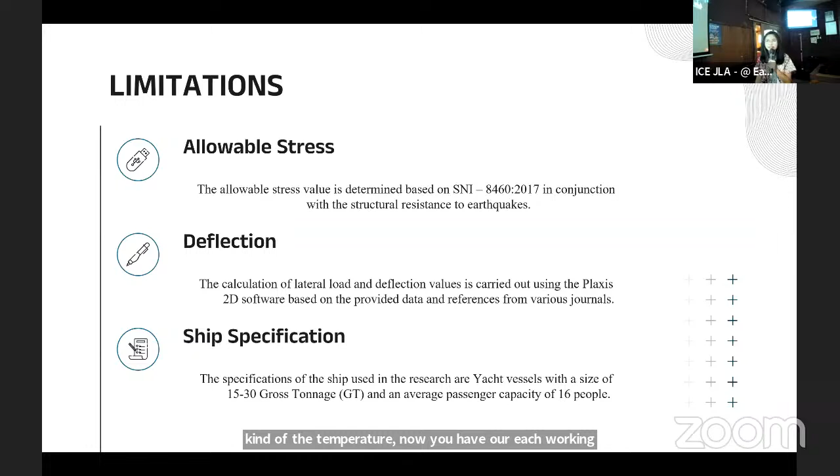The objective of my recent study is to determine the variation of lateral force in the port structure, and also determine the deflection of the pile and satisfactory value for each working phase. The limitation for this study is based on SNI 8460 in year 2017.

The deflection values are carried out using Plaxis two-dimensional software. Based on the provided data, the ship specification is a yacht vessel with a size of 15 up to 30 gross tonnage, and average passenger capacity of 16 people.

Here is the methodology I used for this study. I did the literature study, collected the data, and then modeled the structure with Plaxis two-dimensional. I did verification of the deflection values according to the criteria from SNI 8460 year 2017, and if the value does not meet the requirements, I did the reanalysis by changing the dimension of the sheet pile.

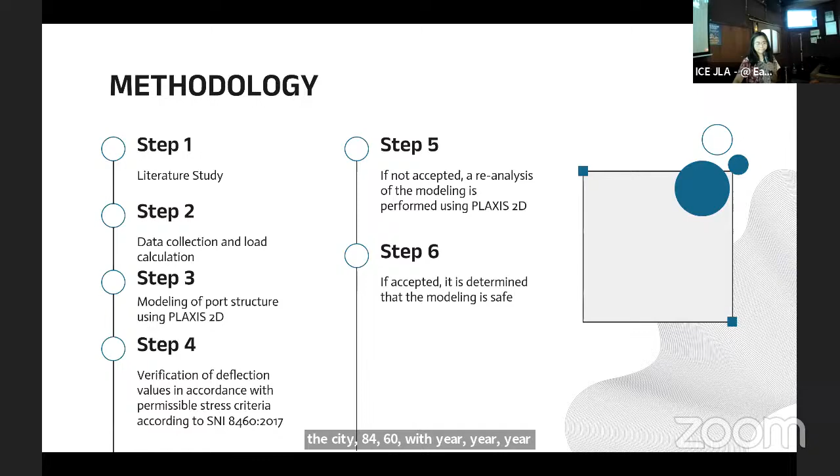Here is the alternative design proposed for this port structure. I recently did the analysis in this square area, which is the most extreme area, with the depth of the sheet pile at -10 meters.

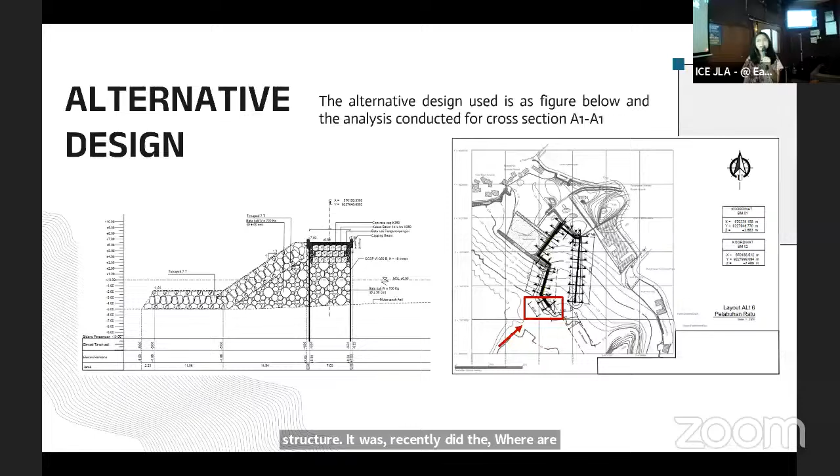Here I did the analysis with the software PLAXIS 2D, which is used to analyze deformation and stability in geotechnical engineering. It is usually used for excavation, embankments, and foundation tunneling, such as mining, oil and gas, and so on.

I also did the calculation for the soil stratification, and the soil parameters found were 4 types of soil layers. This soil parameter was input into Plaxis two-dimensional.

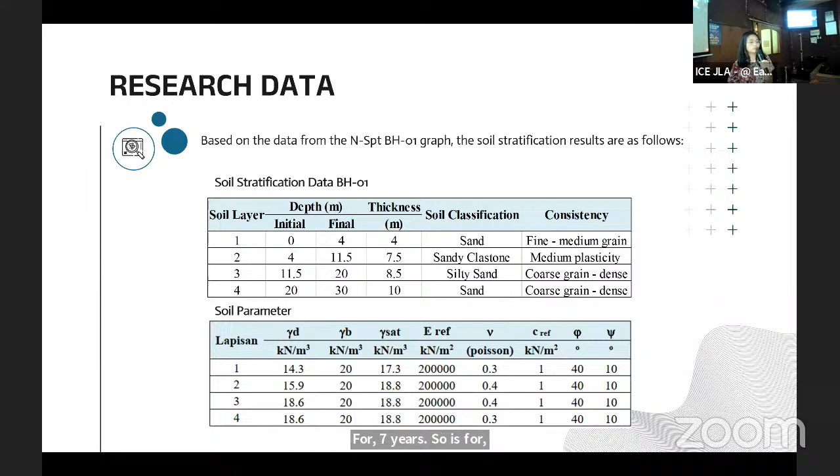I also determined the horizontal coefficient of the earthquake, found to be 0.284.

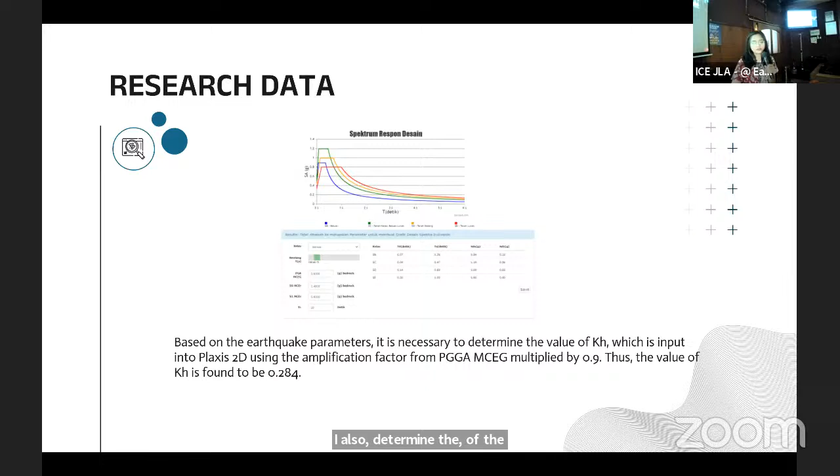In this modeling, firstly we have to determine the working phases. I did the phasing by installing this sheet pile and then continued up to placing the truck load. Next, I also did the load phases such as live load, wave load, mooring, and berthing, and input the safety factor phases to determine the value for each working phase.

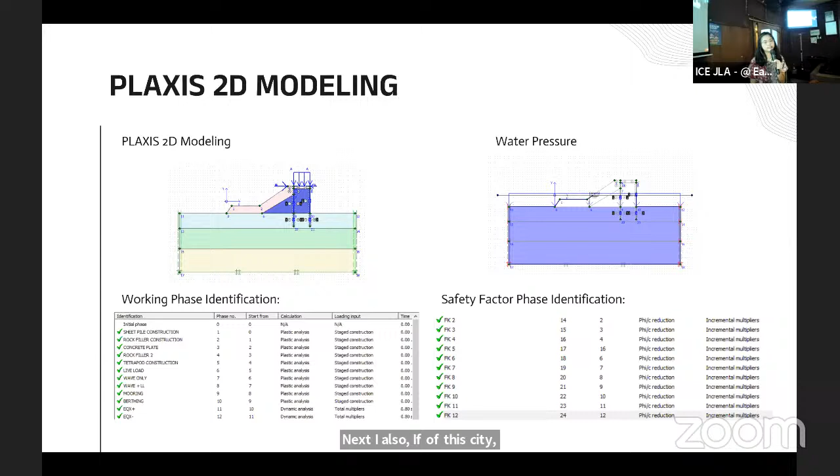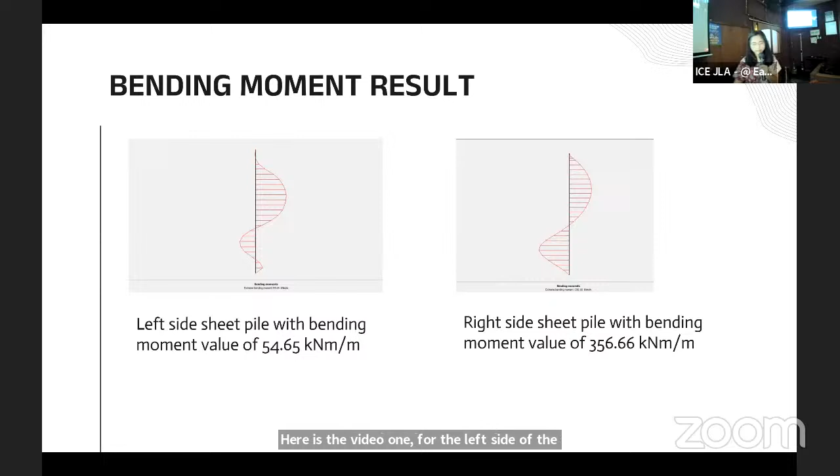So from my recent study, I found that the value for deflection, bending moments, and the safety factor for each working phase still meet the requirements and are still safe. I also found that the dimension of the sheet pile used was CCSP 600, and it is shown that the sheet pile section is still good. Thank you.

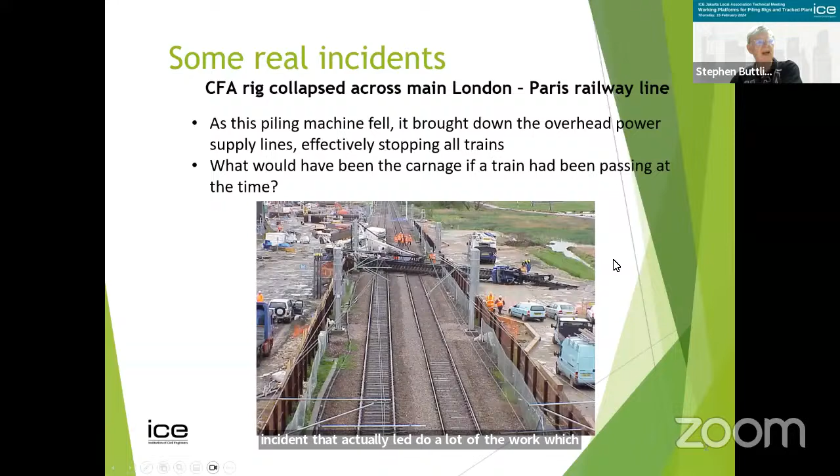My talk here really starts around 2004 when an incident happened and a CFA rig tipped over, bringing down the catenary cables for part of the London to Paris railway line going through the Channel Tunnel. That cut off the power, so no trains came past. Just try to imagine if a high-speed train had been passing at the very moment that piling rig came down - it's hard to imagine the consequences, but they would certainly have been disastrous. It was this incident that actually led to a lot of the work I'm going to talk about. I've got a couple of other examples, but we had problems getting the video sorted out, so I'll brush over these now and come back to them at the end.

I've got some illustrations as to why this is still very important in 2024. I'm going to touch on how we calculate rig bearing pressures, but not in any detail - that's normally done by the piling contractor. I'll touch on whether the main design method is conservative or not, and talk about that method, referred to as BR470, the catalogue number of the BRE report describing the design method. They also did a review of it 7 years later in 2011, which I'll mention. I'll also talk about the Temporary Works Forum of the ICE, which produced a different design guide, and mention the T-value method produced by Andrew Lees, a consultant to Tensar - Mike knows Tensar well and has written papers on that subject. I'll talk about calibration of design methods, the importance of selecting parameters, and work by David Cork and others in the UK and by Andrew Lees.

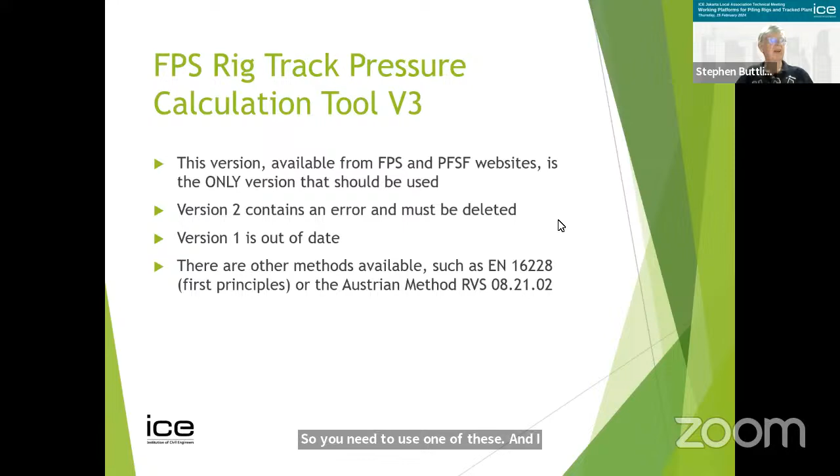So moving on now to the design method, it's all contained in this BRE report, BR470. But there have been suggestions, particularly in Australia, from some people that I know, that it's conservative.

I'm quoting from a written document that I have a copy of, where one of the designers said, we have not followed the BRE method for this platform, as it is known to be highly over-conservative for granular subgrades. And his manager actually sent me another message, which I have in writing, where he said the typical view of most practitioners I met and discussed the issue with support the view that BRE is conservative.

And yet, in spite of these two written statements, I tried very hard to get people to tell me what is it about BR470 that is conservative. In the method, which step do you consider to be conservative? And by comparison with what are you ranking BR470 as conservative? I have not been able to obtain any answers to either of those two questions. People are happy to just bag the method as being over-conservative, but will not actually provide any evidence to support their point of view.

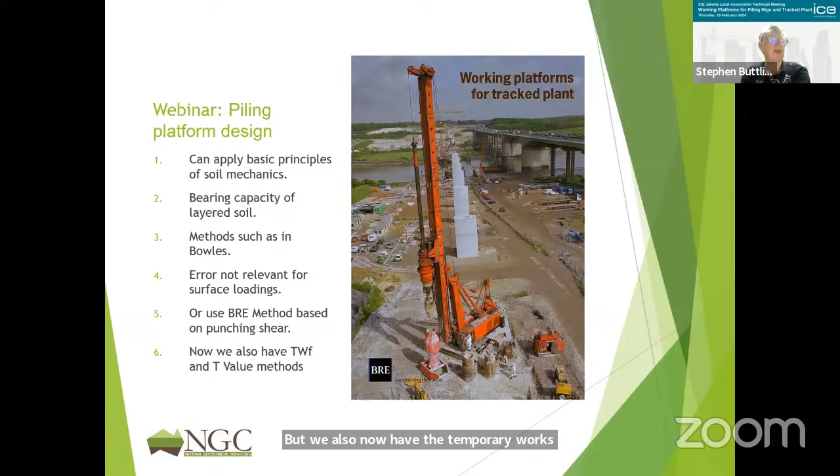But the BRE chose to use a method based on punching shear, and I'll talk more about that in a moment. We also now have the temporary works forum method, which is different, and the t-value methods.

So in the BR470 design process, as always, we need a geotechnical model. We need to define our geotechnical parameters. For the platform, these are the weight density, gamma. A lot of you will probably still call that unit weight, but I've gone away from unit weight following the lead from Europe, because the unit has no meaning. What we now tend to call it, we use weight density for gamma, and mass density for rho, because those better describe what the actual parameter is.

For the platform, we also have an angle of friction, phi dash, and the subgrade. I'm going to concentrate this evening on cohesive subgrades, so we're talking about an undrained shear strength. The BR470 method is only applicable for soils greater than 20 kPa and less than 80 kPa, where a working platform in many cases will not actually be necessary. If your subgrade is weaker than 20 kPa, you need to be very careful and use better, more reliable design methods.

So in the design process, we look at two loading cases. Load case one is where, if the rig is about to tip over, there is nothing that the operator can do to save it. This would be if the rig is just standing there and it starts to fall over — the operator hasn't done anything, so there isn't anything he could do to prevent failure. Typically, if he's just traveling across the site, there's not likely to be much that he can do to prevent a failure. And if he's lifting something, such as a casing, a rebar cage, or a precast pile, he's not going to be able to put any of those things down fast enough to prevent a failure.

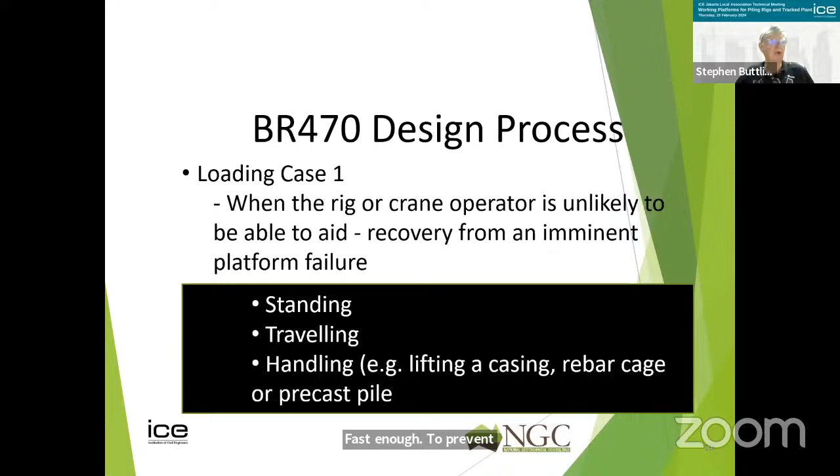So all of those are referred to as load case one. The alternative is load case two, where the operator can do something. Typically these are where the operator is applying a force, either a crowd force, a downward force, say to install a casing or a drilling tool, or an uplift force or extraction force to try and pull an auger, a bucket, or a casing out of the ground.

And if either of those is producing instability, causing the rig to tend to fall over, basically the operator can ease off on the throttle, stop pushing down or stop pulling up, and the problem will be mitigated. It's also just about possible if they're traveling or slewing and either the mast foot or the load itself, suspended load, is sufficiently close to the ground that it can be put down to prevent failure.

Not necessarily quite as easy as just easing off on the throttle, but those are considered to be load case two. In the design process, the bearing pressures are generally not going to be a uniform pressure along the length of the tracks. They'll typically have a higher pressure at one end and a lower pressure at the other, like Q2 and Q1 here, giving a trapezoidal bearing distribution.

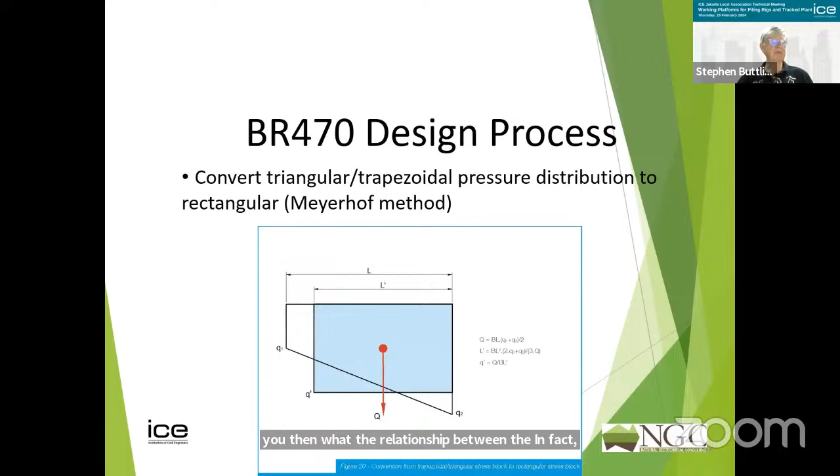And the geometry will tell you then what the relationship between the effective pressure Q dash and the pressures Q1 and Q2 are. That then will give us two uniform bearing pressures. Case one, a smaller pressure over a longer length, L1K, and case two, a higher pressure over a shorter effective length, L2K, with the track width, WK, being the same in both cases.

So first of all, we say, is a platform required at all? We check if the subgrade alone can support the track load. We do a standard bearing capacity calculation, and for case one, where we can't do anything about putting the load down, we use a load factor of 2. And for case two, where we can put the load down, we use a lower load factor of 1.5.

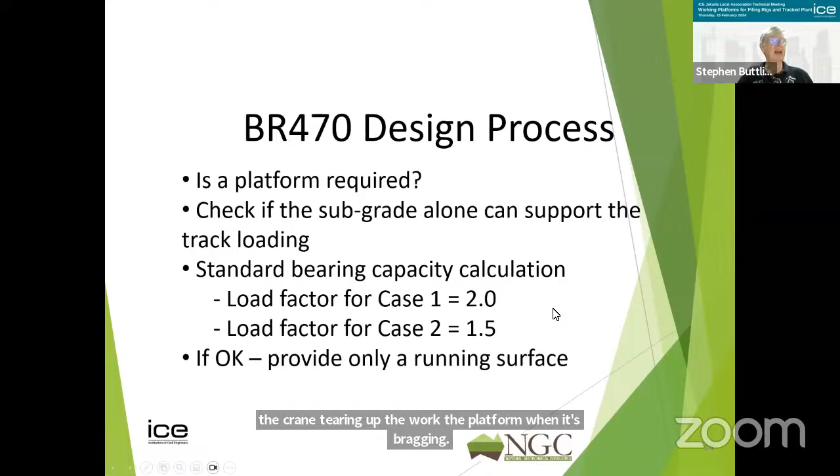And if both of those are okay, all we need to do is provide a running surface, a crushed rock surface, probably at least 150, maybe 300 mil, to stop the crane tearing up the platform when it's spragging, but a working surface is okay. If they're not okay, then we need to design a working platform.

And the first thing we have to do is check that our platform material that we're proposing to use is good enough to provide the necessary bearing capacity. Now our load factors have come down from 2 to 1.6 and from 1.5 to 1.2. And that's because we were using 2 or 1.5 for natural ground. And we know that natural ground is very variable.

It has spatial variability. But it's considered that a working platform, being a man-made platform with imported material that's been spread and compacted and tested, is more uniform, more reliable than a natural soil deposit. So we have lower load factors. But if those are okay, then a working platform can be designed. If they're not okay, then we need to get a better material for our working platform. And that basically means a higher angle of friction, phi. And if they are okay, then we go ahead and we determine the thickness of the working platform.

The BR470 process relies on what we call punching shear, because we've got this whole question of what happens under this loaded area through the granular soil. Many of us will be familiar with load spread, but there's a lot of debate about what the angle of load spread should be, and lots of different ideas. BRE decided to avoid those by using a vertical shear surface and calculating the punching shear on pushing the rig track down through the granular platform, and then a log spiral type failure surface in the underlying subgrade.

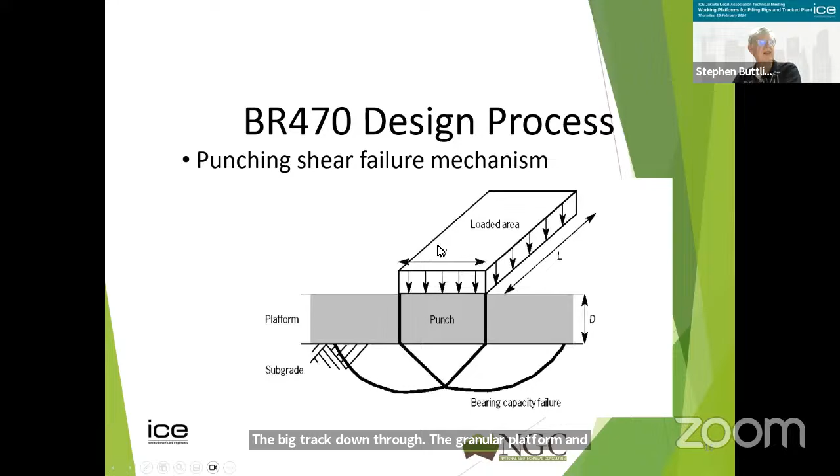This again shows how you'll have a lateral earth pressure against that vertical punching shear surface and the sort of distribution of side shear that you might get.

So the BRE determined this equation where D1 is the platform thickness. The numbers that we put in are WD, which is the width of the track, Q1D, which is the design value of the bearing pressure, the undrained shear strength, the bearing capacity factor, and a shape factor, all to the power of a half, divided by the weight density of the platform, the Kp tan delta of the platform, and a shape factor for the platform.

We do this calculation knowing all of these values on the right-hand side. We can calculate the required thickness. We check that the platform is at least 30 centimeters or half of the track width, whichever is less.

I am quite certain that this is where the calibration of the BR470 process was carried out, and that is an absolutely vital part of the process. What I am quite certain the team at BRE did was use more rigorous calculation methods, which could have been finite element methods, analytical methods, or both.

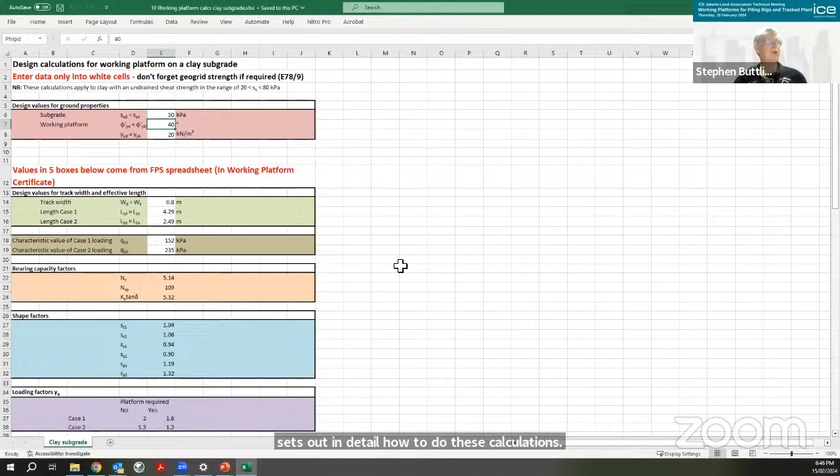In the back of the BRE report, BR 470, it sets out in detail how to do these calculations. And I've made them into a spreadsheet. It's fairly simple.

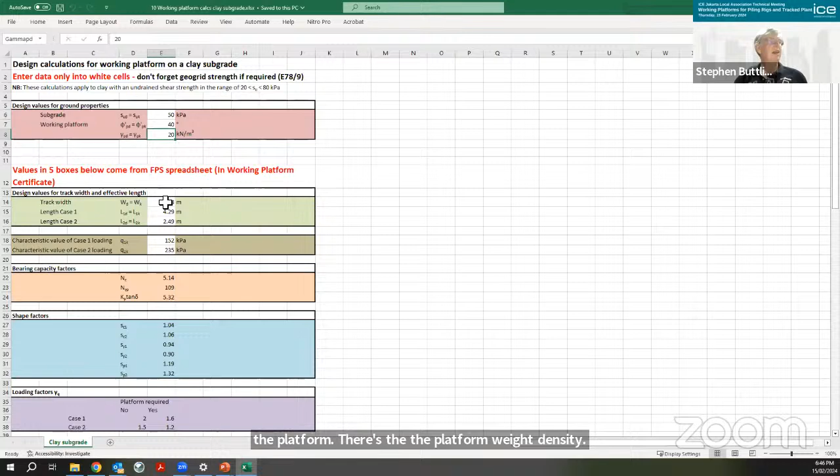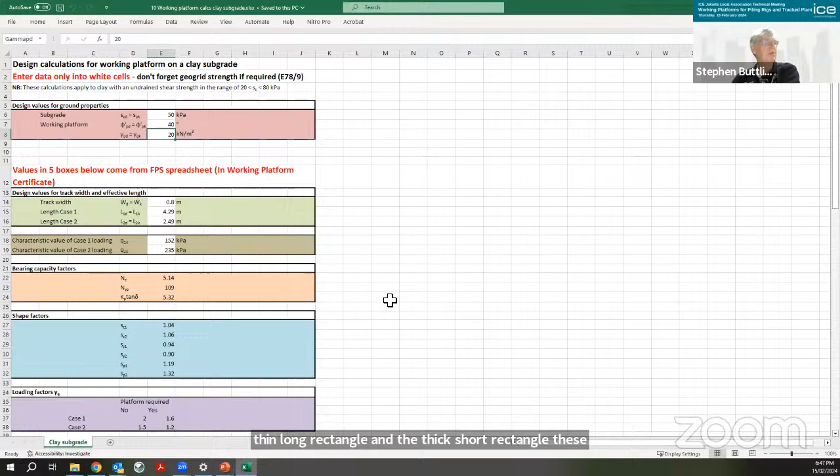There's the undrained shear strength of the platform, the subgrade. There's the chosen friction angle for the platform. There's the platform weight density, and here we have the track details, the track width, the bearing pressure length that comes out of those diagrams that I showed you earlier with the thin long rectangle and the thick short rectangle. These are the pressures for those, and when you put those numbers into the spreadsheet, down at the other end...

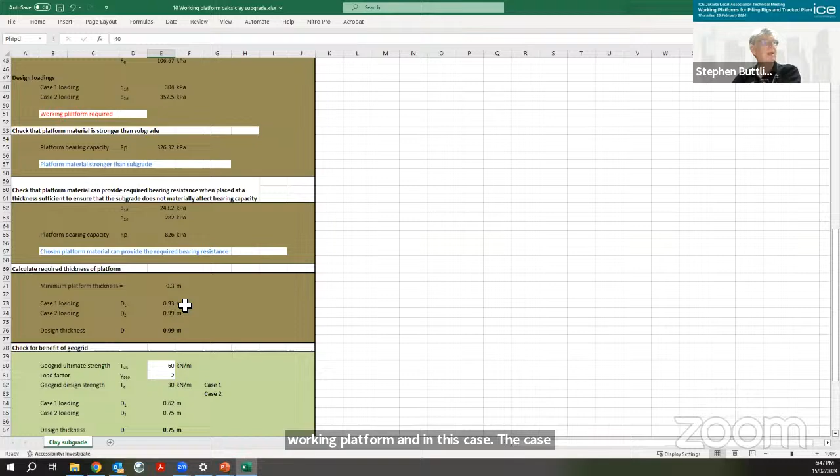Well, this wasn't a very good example, so let me just change - let's change that to 20. And we can now see straight away, we're needing a working platform. In this case, the case 2 load is giving the more critical case, despite the fact that its load factor is lower, and we're needing a 990 mil thick platform for that case.

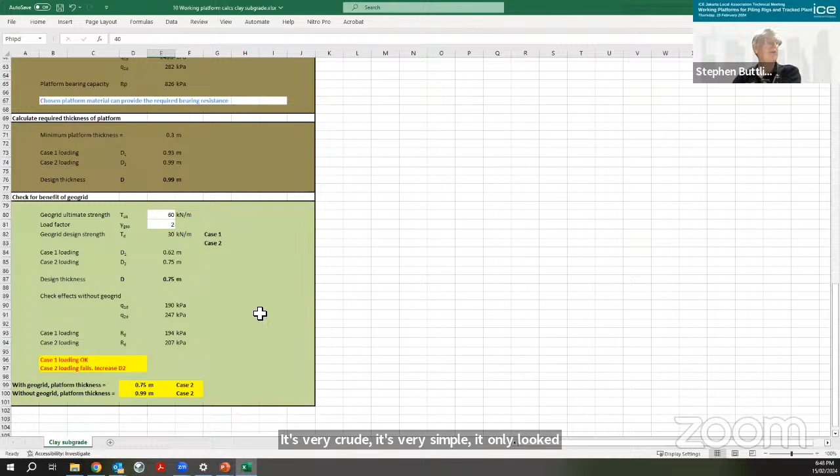In the BR 470 method, there is an option to look at geogrid reinforcement. It's very crude, it's very simple. It only looks at the tensile strength of the geogrid and uses that to reduce the applied bearing pressure. It's very generic, you can use it as a guide to see whether a geogrid reinforced platform might be beneficial.

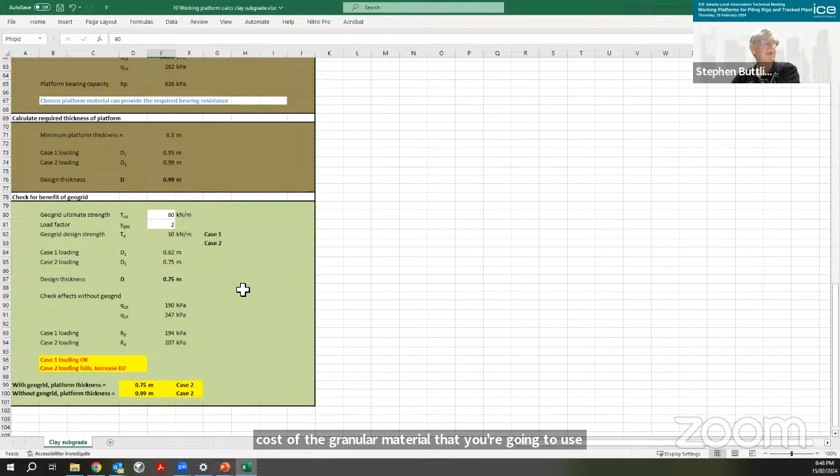Particularly if you've got some idea of the unit cost of the granular material that you're going to use for the platform, and if you've got some idea of the cost of your geogrid delivered to site, because those two are going to vary from one site to another. Where particularly on a remote site somewhere where it may be very expensive to bring in good quality granular material, you may well find that geogrid reinforcement has a cost benefit.

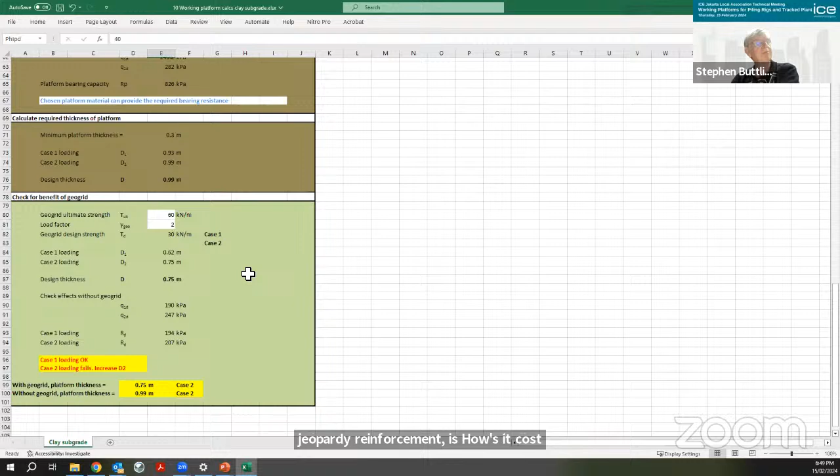On the other hand, in a site where good granular material is readily available, and maybe you're paying significant transport costs, import duties, and so on for geogrid, it's less likely that there'll be a cost benefit. This is really just a crude tool to give you an idea, and if it looks as if geogrids are beneficial, you're best off to go to your geogrid supplier and get them to do detailed calculations with their own method. But I'll come back more onto that later.

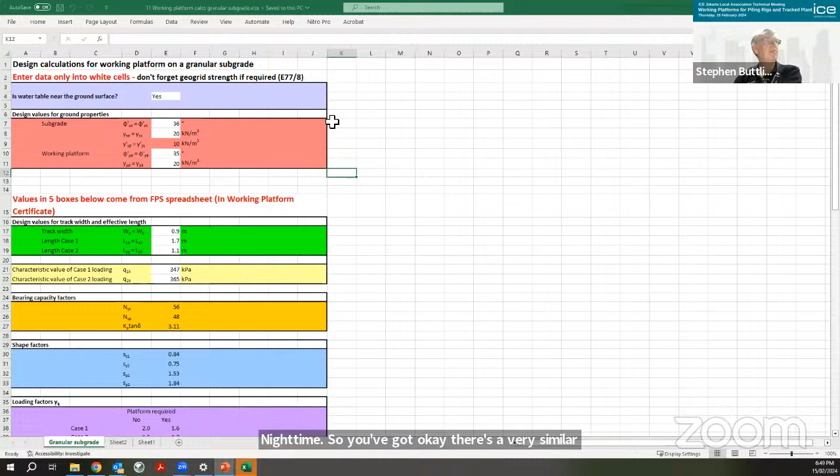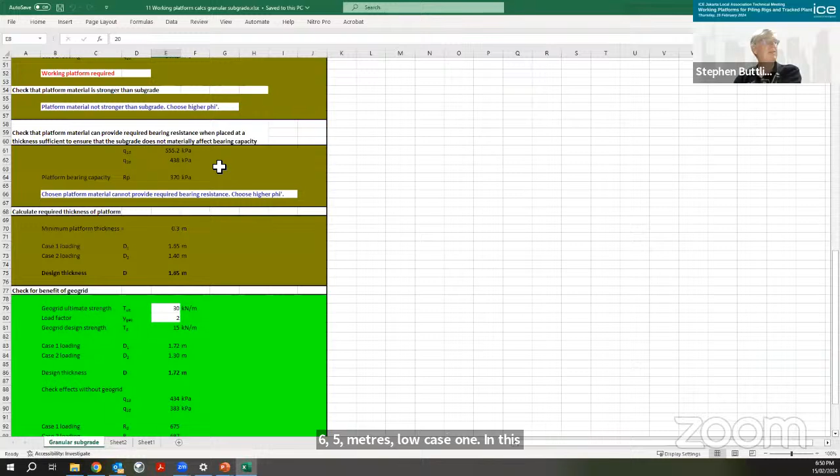So that's a very similar calculation. I won't go into it in detail now, but for granular subgrades we've got phi dash to the subgrade, the weight density of the subgrade, and again the track lengths and widths and bearing pressures. In this case we need about 1.65 meters. Load case 1 is critical, but we can calculate a required thickness, and again we can quickly check whether a geogrid might be beneficial.

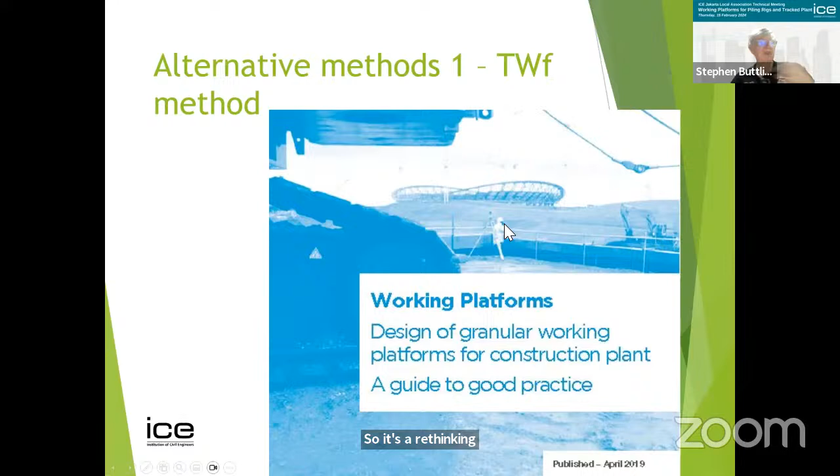Moving away from BR470, in 2019 the Temporary Works Forum of the ICE produced this guide. It's not specifically related to piling plant, it's all construction plant, and it includes haul roads and so on. So it's a rethinking, but it runs in parallel with BR470, which is mentioned within the guide.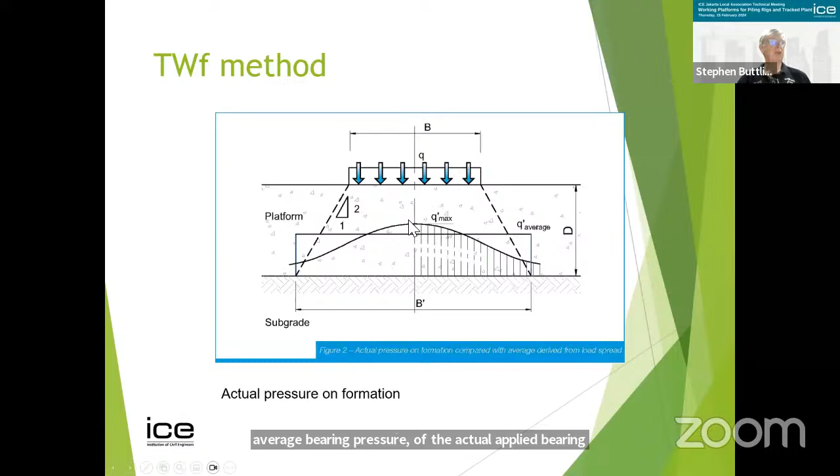This is the sort of typical load spread model I referred to before, and it's this angle beta that there's a lot of argument about. What it does is affect the distribution of the actual applied bearing pressure. There's a schematic average bearing pressure, but that's an idea depending on the stiffness of the subgrade and the stiffness of the track as to what the distribution might look like.

Elastic theory is used, so this is for perfectly elastic materials. A plate of diameter 2b has different bearing pressure distributions depending on the stiffness. If the plate is rigid, you get a distribution that's minimum in the middle with a peak value at the edges. If it's much more elastic, you start to get a different distribution, according to elastic theory.

In a real clay, if this foundation is rigid, the contact stress will look like this - we'll get peak stresses at the edge, and our deflection distribution will be consistent, uniform under the rigid foundation, with some settlement profile at the edges. If it's a flexible footing, we'll get our traditional saucer shape.

If it's a real sand, the opposite happens, and we get these sort of pressure distributions. We've still got a peak at the edges where these cut into the soil, but it's not as exaggerated as with the clay foundation.

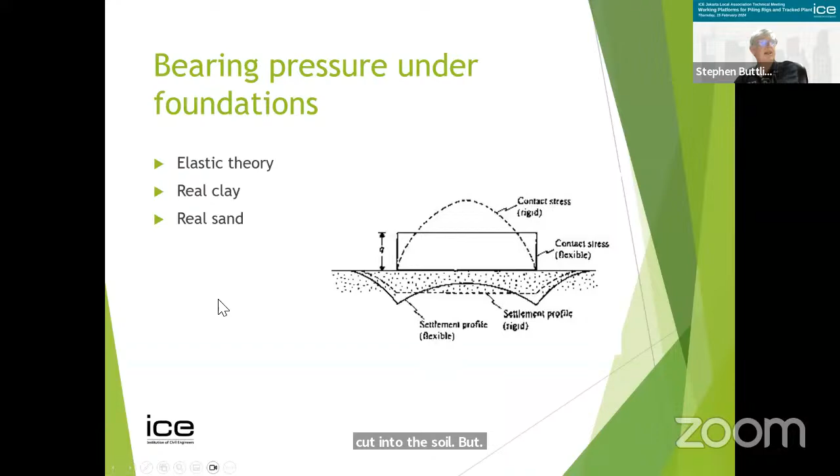Within the TWF manual, they give this diagram for the punching shear model, which is very similar to what I showed you before. They talk about methods that may be used for unreinforced platforms - the TWF method, which can be used for all subgrades, and the BR470 method for soft to firm, cohesive, or granular, but only a single layer. So there's only 2 layers in the BR470 method: the working platform itself and the subgrade.

A third option is a CIRIA report from about 1993, I think, called SP123. Again, it's only a single layer and soft clay. I have not actually spent any time looking at that method.

Then for reinforced or stabilized platforms, the design standard is BS 8006. There's a very simplified approach in BR470, and there's something in SP123, but I would expect you normally to be using the manufacturer's methods, which are, of course, not codified.

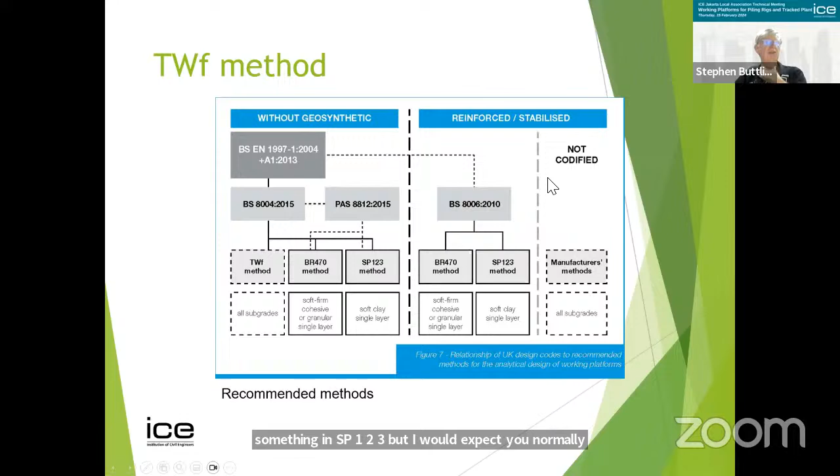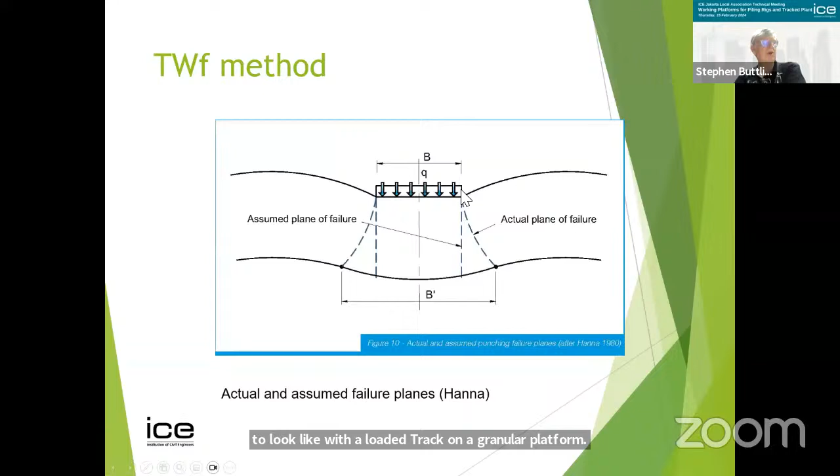So this is what the displaced form is likely to look like with a loaded track on a granular platform. This is the assumed failure plane in punching shear based on the work of Professor Hanna, whereas the actual failure planes are out here somewhere. But of course there's probably no shear on this failure plane because it's going to be in tension, whereas there is shear on this assumed failure plane.

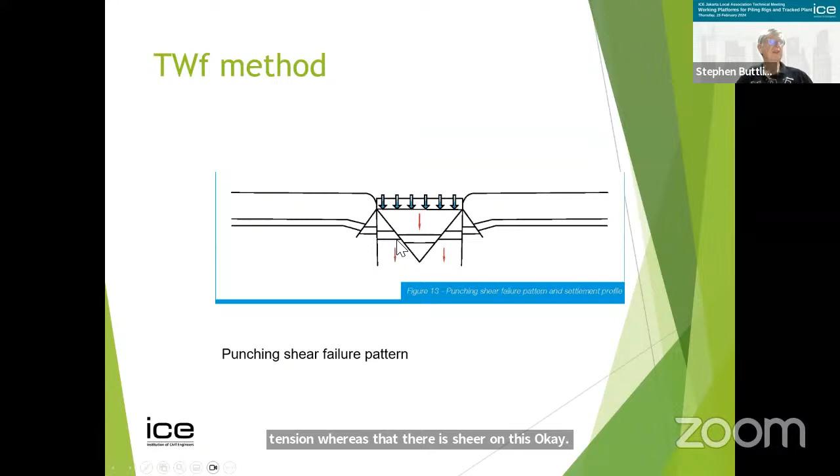This is a sort of failure pattern that you might expect due to the punching shear model. And again, these can be put into a spreadsheet. So this is the spreadsheet for the cohesive soil.

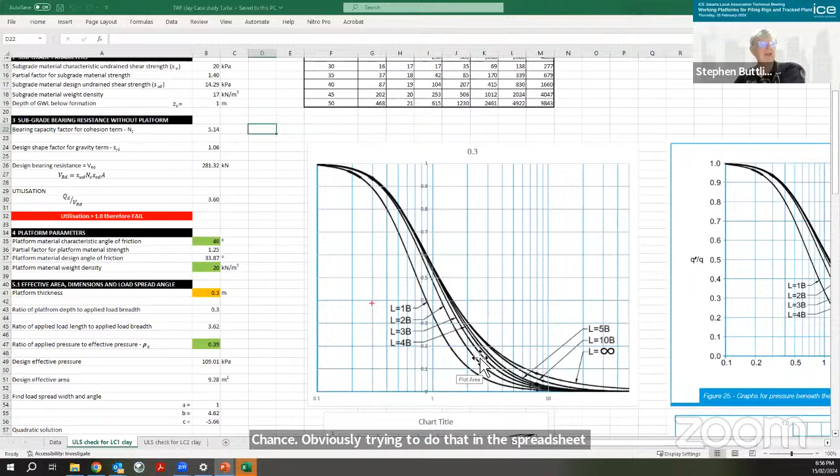Some of you clever people can find a better way of doing this than me, but it requires an iterative process. There are charts, and these are examples of the charts provided in the TWF method, and you have to pick numbers from these charts. Obviously trying to do that in a spreadsheet is a bit difficult. I know some people have actually fitted curves through each of these lines, and that allows them to generate a spreadsheet which will just do the calculations itself.

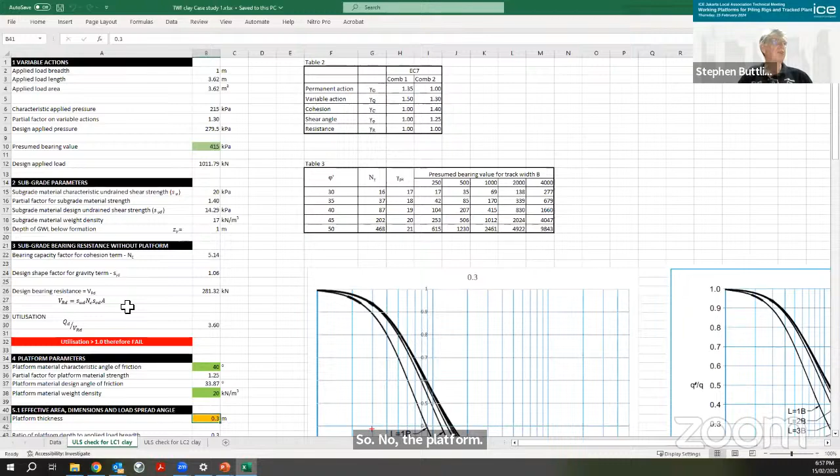I'm not that clever, so I use the spreadsheet as the background in this chart, and here is where I need to put in the platform thickness. This first bit up here is checking whether the subgrade is strong enough, and we can see that the utilization is 3.6, which is well over 1. So no, the subgrade on its own is not strong enough.

So now I've nominally put in a value of 0.3, and the first thing I have to do is move this point up to coincide with the curve up here. So that's going to be about 0.95. What happened there?

Oh, sorry, it's just gone and decided to— right, okay, sorry about that.

So I'll try and put 0.94. Hope it doesn't reset. Yeah, okay, so that's just about lying on the line. That one's near enough on there. And when I come down here, oh, the numbers are so far out, it's not even trying very hard.

So, okay, that number is far too low. Let's try 1.2. Right, that's now moved me over here. So I've got to put in a value of about 0.4, 0.7, somewhere around there. That one's not too far out.

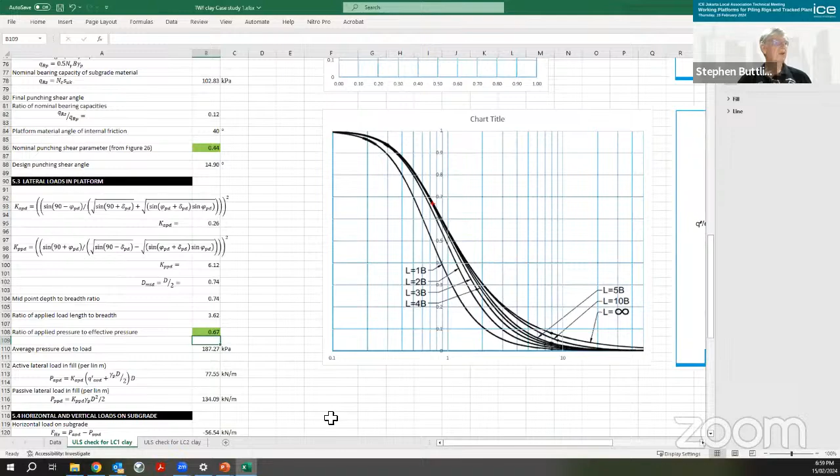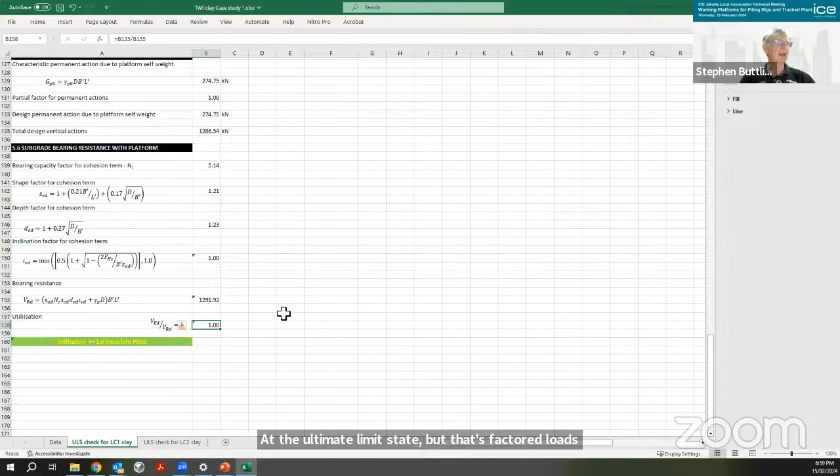Right, and now I'm right on 1. So that's a very, very well designed limit state design, because my resistances are equal to my actions at the ultimate limit state. But that's factored loads and factored strengths, so that's just about okay.

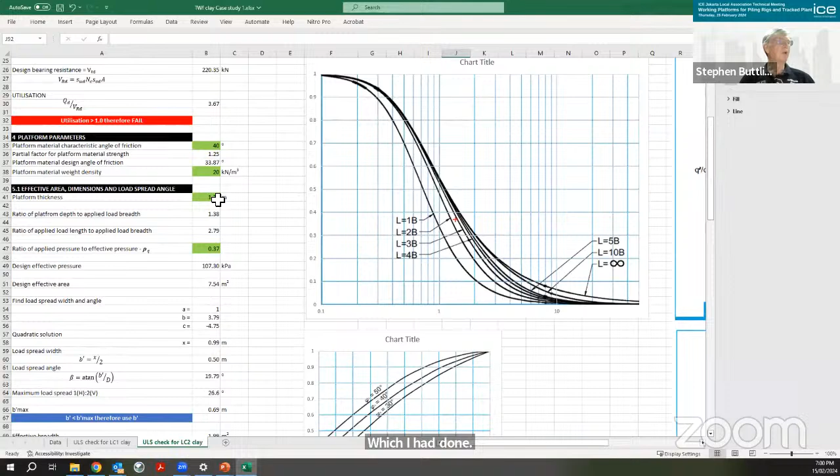So that's the process that you can go through, and you have to check load case 1, you have to check load case 2, which I have done, and I've got 1.38, so load case 1 is going to govern, and that can all be done.

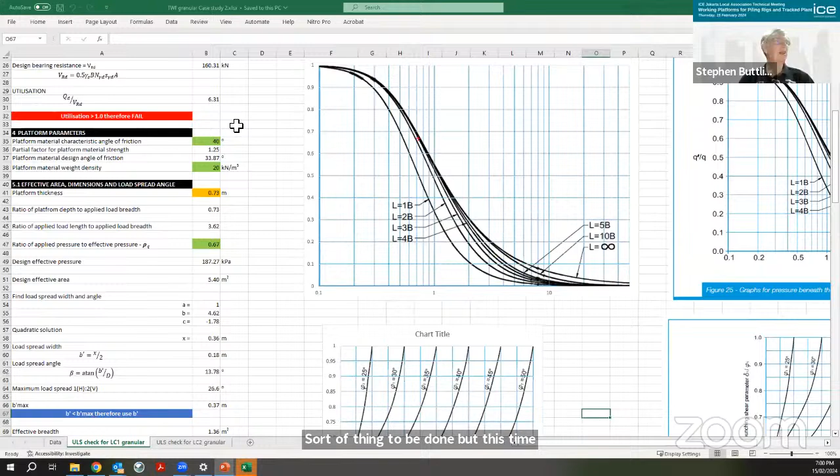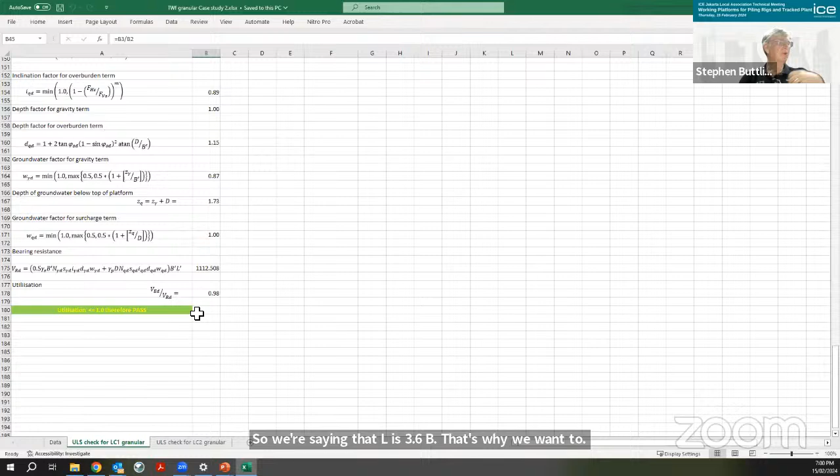So again, the same sort of thing can be done, but this time with granular subgrades. It checks whether we need a platform at all, and then we have to put in a platform thickness, adjust this cross to lie on the right L over B curve, which is coming from here. So we're saying L is 3.6B, so we want to react somewhere near 4. And by the time we follow through, we get 0.98, which is very good, 98% utilization.

So though that's the TWF method. Moving swiftly on to the t-value method, which is based on a lot of work done by Andrew Lees, and it's now been adopted by Tensar, and I think it's within the Tensar Plus and available on their website. But Michael, correct me, I'm sure, if I'm wrong.

Oops, sorry. So it's based on looking at applying a pressure over the width B through a granular layer onto, in the first publication, a cohesive subgrade. And what Andrew did was to get hold of the results of about 60 centrifuge tests that were published by Okamura et al, and he analyzed these using the finite element method, did a whole lot of numerical analyses.

And what he found was that there was a linear relationship between the increase in the allowable bearing stress, or the ultimate bearing stress—sorry, the increase in the ultimate bearing stress, described as the ultimate bearing stress that platform can support, compared or divided by the bearing stress of the subgrade. And there's a linear relationship between that and the ratio between the platform thickness and the footing width, H over B, for infinitely long footings, strip footings, or between the square root of the bearing stress and H over B for square or circular footings.

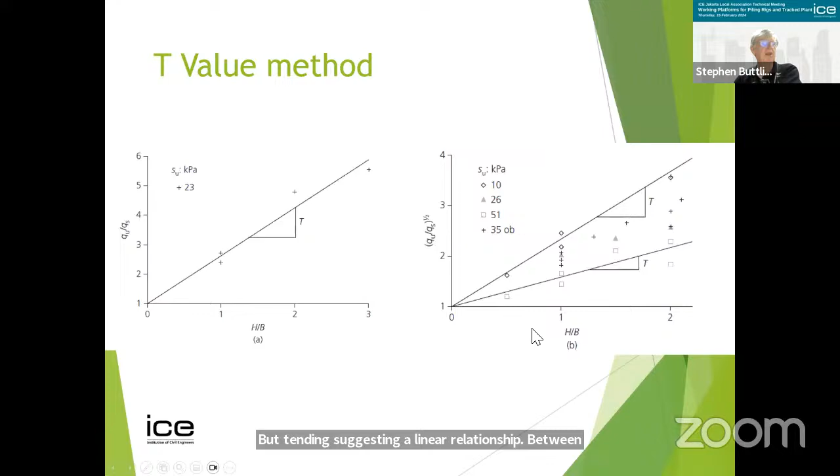And then for the square or circular footings, he plotted the square root of the increase in ultimate stress against H over B. Again, a bit of scatter. You can see the different symbols for different undrained shear strength, but suggesting a linear relationship between the square root of the stress increase and the H over B ratio.

So from this, he determined that the increase in stress was equal to 1 plus T times H over B, as long as the increase in stress was less than that for the granular material itself. And the same increase in stress varies with the square of 1 plus T times H over B for square or circular footings. So using those values, and he did lots of numerical analyses and compared them with Okamura's results...

...and other published data, and found that the T value, the gradient, varied with the normalized undrained shear strength of the subgrade according to a power law. And the normalization he did was to divide the undrained shear strength by the effective stress at the interface, which he called P0 dash.

So one of his basic equations then became: T, this efficiency factor, is 1.4 times SU over P naught dash to the power of A plus B.

And for unreinforced platforms, he found that A is equal to minus 0.41 phi dash minus 0.18. B is equal to 4.2 phi dash minus 3.4, where phi dash are in radians, not in degrees.

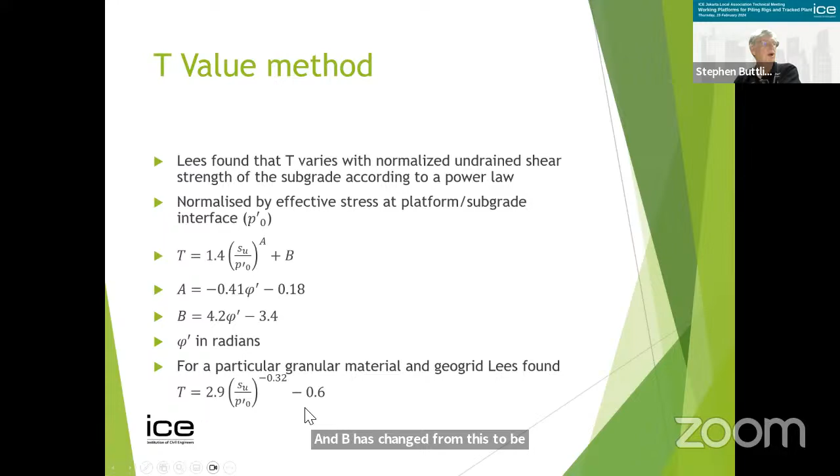So his 1.4 has gone to 2.9. A has changed from this to be minus 0.32, and B has changed from this to be minus 0.6 for a particular granular material and geogrid combination.

So I then wanted to compare different methods, partly because I've been hearing this talk of BR470 being conservative. So I wanted to do some calibration myself.

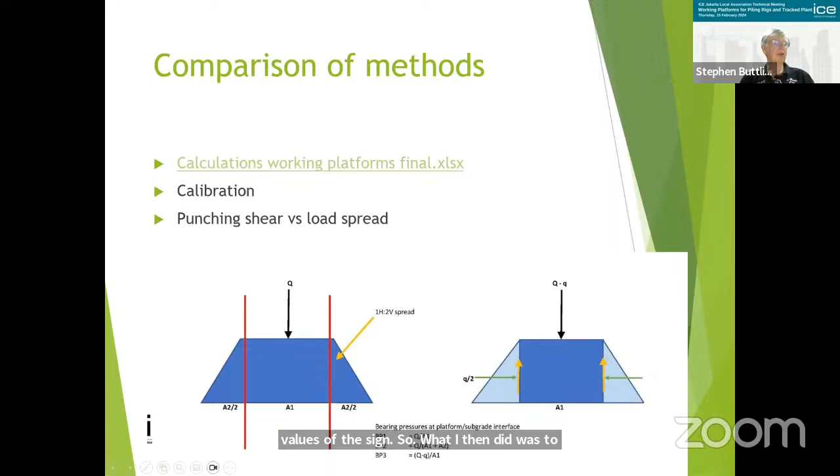So what I then did was compare this BP2 and BP3. And here we are, this is BP1 up here, so that's just with no load spread and no punching shear. We've got 400 kPa all the way down.

So this now is for assuming punching shear, but with a platform friction angle of only 35 degrees. And we're looking at different track widths: 1 meter, 800 mil, and 600 mil. So if we're using load spread, that's BP2, we're getting these solid lines through here, okay?

Sorry about that. And these are the load spread curves, the solid lines. And then if we've got a friction angle of 35 degrees and we use the Kp tan delta method, we get these pressures up here. So these bearing pressures are higher than the load spread bearing pressures, but that's only for these dotted lines, which are for phi of 35 degrees.

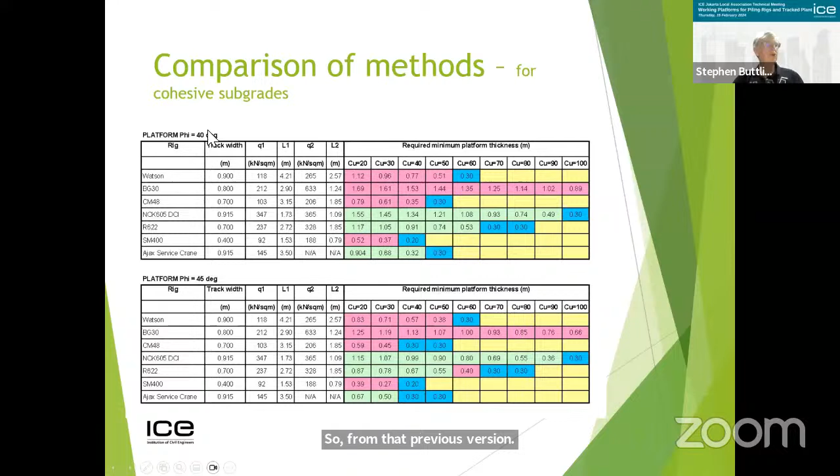From that previous version, if I took all the platform thicknesses, all the subgrades, all the different machines, there were 138 different load cases. That was too many for me, so I picked out 19.

I then ran those load cases through the BR470 method, but also through the TWF method using the spreadsheets I showed you earlier, through the t-value method, and also an online software called Platform, produced by the NAUE geotextile manufacturer.

It included track widths that varied between 0.7 and 1 meter, effective track lengths for L1 between 1.73 and 4.21 meters, effective track length for L2 between 1.1 and 2.8 meters, bearing pressures for Q1 between 120 and 350 kPa, bearing pressures for Q2 between 265 and over 600 kPa, and subgrades from 20 to 100 kPa. So a good range of loadings, track lengths, and subgrades.

And these were the results that I got. The top set is for load case 1, the bottom set is for load case 2. The blue curves are the TWF method, the orange ones the BR470. The gray one is the t-value method using limit state design, and the yellow ones are the t-value method with working stress design.

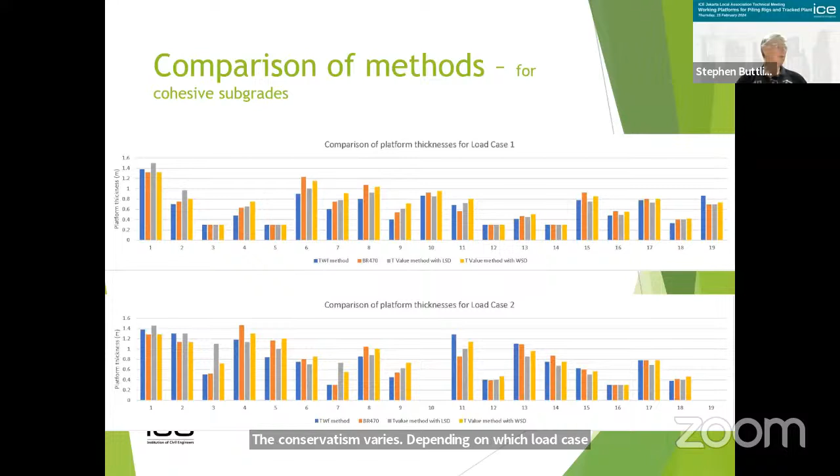And I was very pleased that... yeah, go on. Is it? Sorry about that. So where am I?

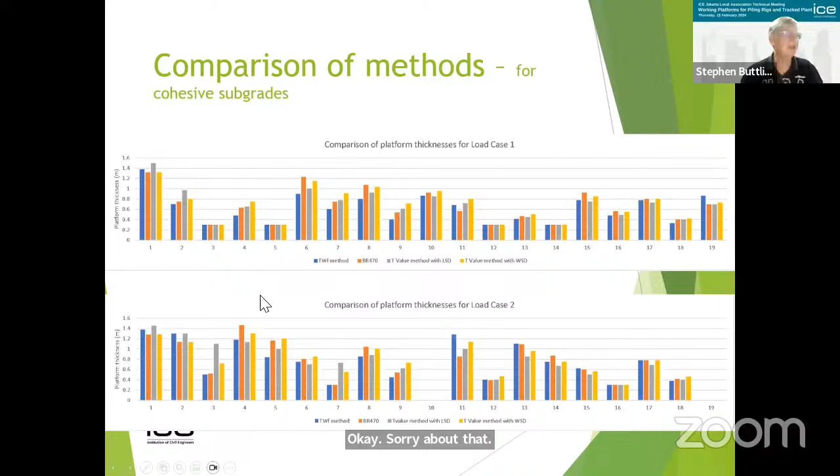Very pleased that that showed that there was no specific conservative method. I wanted to include the NAUE method, but that doesn't tell you whether it's load case 1 or load case 2, so I had to choose the critical platform thickness. The blue line here is for the NAUE platform software, and again, it's not consistently more or less conservative than any of the other methods.

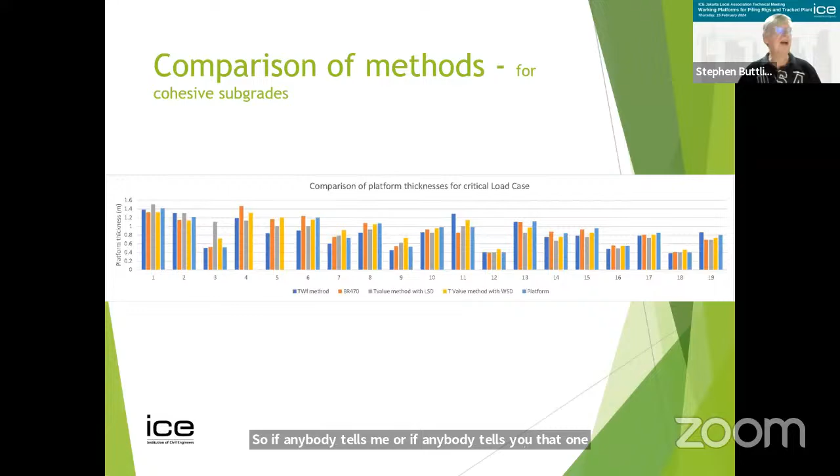So if anybody tells me, or if anybody tells you, that one of these methods is conservative, I think they're talking rubbish. They're talking about feelings rather than facts. So I consider it's not possible to say that any of the 4 methods is either conservative or non-conservative across the whole range.

BR470 uses the KP tan delta method. The Temporary Works Forum uses a 1-on-2 load spread. The t-value method uses the results of finite element analysis and large-scale testing to determine the load spread empirically. So they're all very different methods.

There's no reason why they should give the same answer, and they don't, but there's certainly not one which is consistently conservative or non-conservative.

With regard to stabilized platforms, BR470 did a review 7 years on in 2011, and they allowed for geogrid suppliers to produce their own validated methods. This is very important because, as I've said, and I'll say a bit more in a minute, each geogrid is different, each granular material is different.

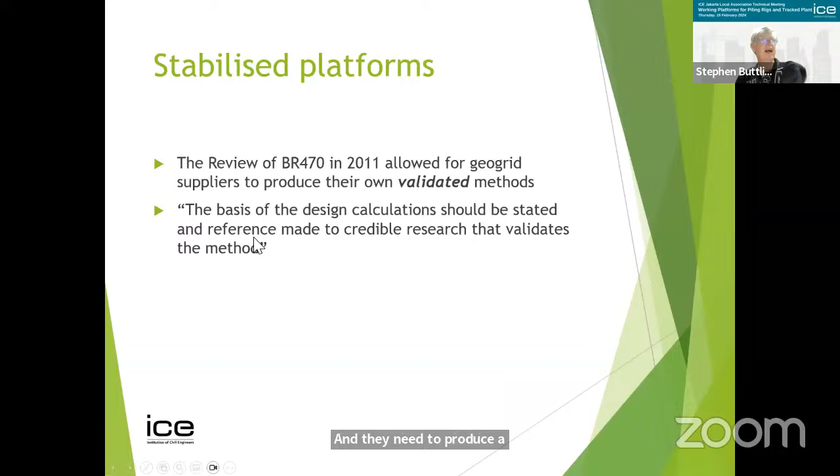And it's been shown quite conclusively that the way that they interact is what's essential, and those interactions are all different. So this has to be done by the manufacturers, and they need to produce a basis of design calculations that is stated and references made to credible research that validates the method.

BRE, as I've said, does allow for the use of geotextile. It's very simple: it just takes the ultimate strength and divides it by 2. And that benefit becomes 2D, 2 times TD over W, where W is the track width.

But there is now evidence to show that geogrids can do much better than that. It's not even recent, it's been around for 40 years, when load spreading of 45 degrees or more was suggested by tests at Oxford University.

And that's been backed up by a lot of work on load transfer platforms to do with ground improvement over piles or control modulus columns, where they work in reverse. And the experience has been gained on a lot of working platforms and wind farms.

Sorry, Evie, shut up. No.

The wind farms, of course, often require very high lift over soft soil.

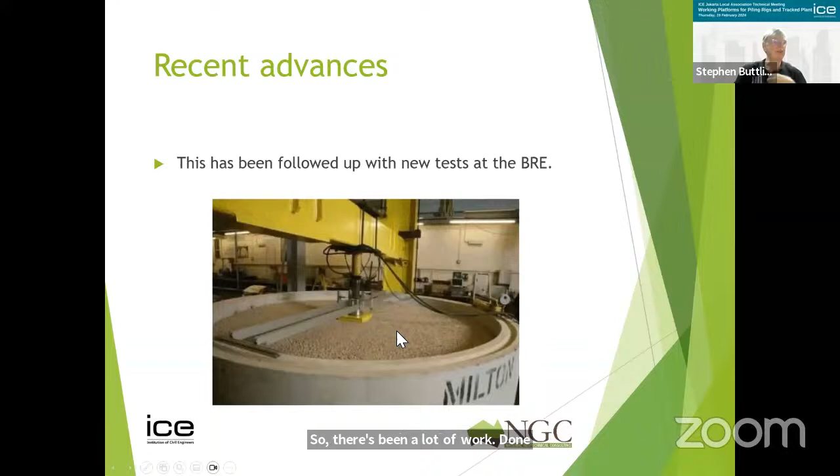So there's been a lot of work done, and new tests have been done at BRE in this test chamber, and a 300 millimeter thick layer of gravel was placed over a soft subgrade. And when it was loaded to 35 kilonewtons, this was what the soil strains looked like on soil displacements.

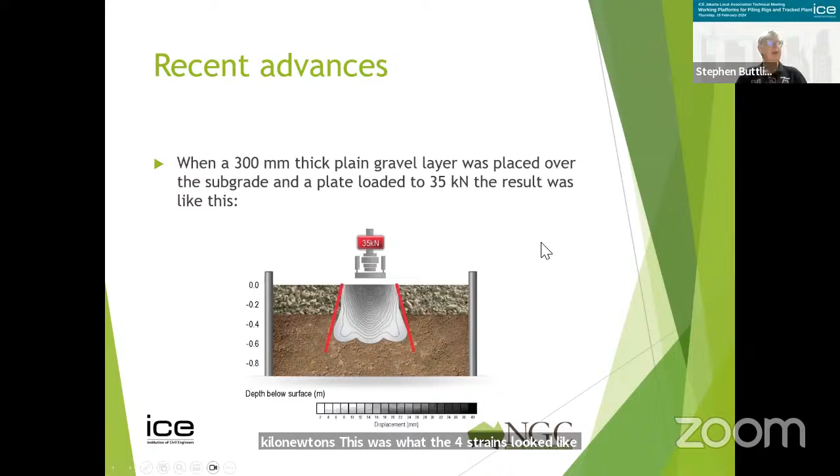In their report issued in 2011, their 7 years on review, they allowed for better load spreading, but they left it up to manufacturers to verify and publish what that should be.

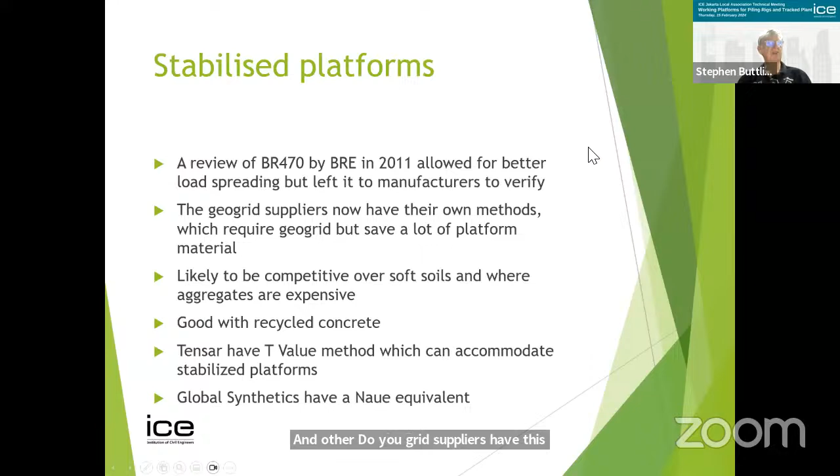Several geogrid suppliers have now produced their own methods, which require geogrid but save a lot of platform material. They're likely to be competitive over soft soils, or particularly where aggregates are expensive, and they're very good with recycled concrete. Tensar have used the T-value method, which can accommodate stabilized platforms, and other geogrid suppliers have this Naue equivalent, which uses software available online.

Andrew Lees and Tensar put some geogrid in some very large triaxial tests, about 1 meter diameter and 1.5 meters high, and found that the Mohr-Coulomb failure envelope has significant curvature. The best way to describe this benefit in a numerical model was to have an enhanced apparent cohesion. So the numerical modeling of these geogrid reinforced granular materials can be done, for instance, within Plaxis, using enhanced parameters with an enhanced apparent cohesion.

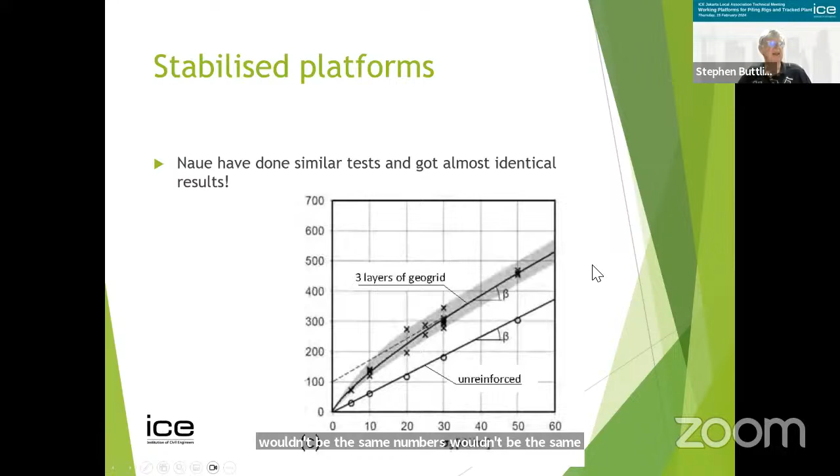But interestingly, another supplier has done similar large triaxial tests, and you can see they also get a curved failure envelope. Different geogrid, different granular material, but still getting the same shape of response. Wouldn't be the same numbers, wouldn't be the same values, but they're getting the same shape of response. I think that's very interesting and encouraging.

But what we must not lose sight of is a cautionary note. Working platforms are frictional, and they're very sensitive to the friction angle. That's particularly because the punching shear is determined as Kp tan delta. Tan delta is a function of phi dash, Kp is a function of phi dash, so the product Kp tan delta is doubly a function of phi dash, and it's very sensitive.

So if you put in conservative values, a subgrade friction angle of 32 degrees, and a weight density of 18 kilonewtons a cubic meter—these were parameters given for a working platform design that I was reviewing—with a friction angle for the platform of 40 degrees, the platform thickness was required to be just over a meter, 1.02 meters. If you increase the friction angle of the platform to 45 degrees, that came down to 740 mil. If you increase it to 50 degrees, it came down to 0.52 of a meter, very close to half of the platform thickness for a phi dash of 40 degrees. So you can see that it's very sensitive to the platform friction angle.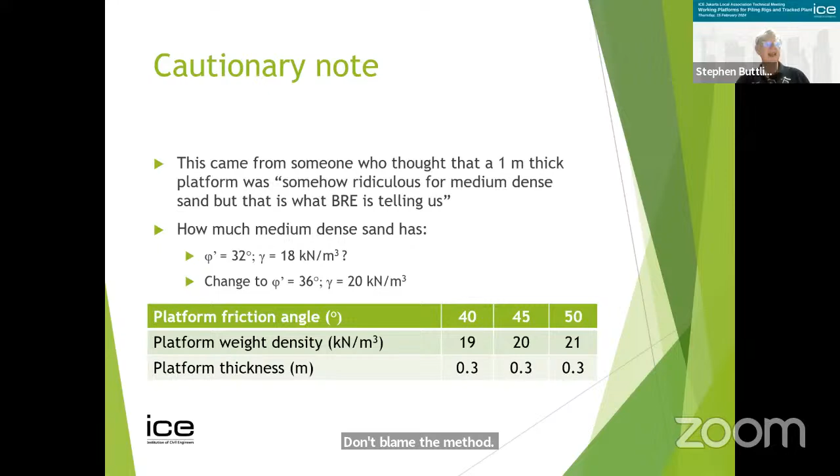So I mentioned already David Corke. He did a review of BR470 in about 2009, published a paper in Ground Engineering, and showed that it was very important to use proper values for the subgrade shear strength and for the platform shear strength. This more recent paper in 2021, also in Ground Engineering, is reporting on some tests on very small diameter plates in a centrifuge, but he did careful analysis, careful testing to show that the scaling was appropriate.

And they measured friction angles, according to these plate tests, of 58 degrees for one, 58 degrees for another. So those sort of friction angles are actually available, can be demonstrated by testing, but David Corke's recommendation is that those are too extreme, that he would not recommend going above 50 degrees, but even then, that's a very high friction angle and very useful.

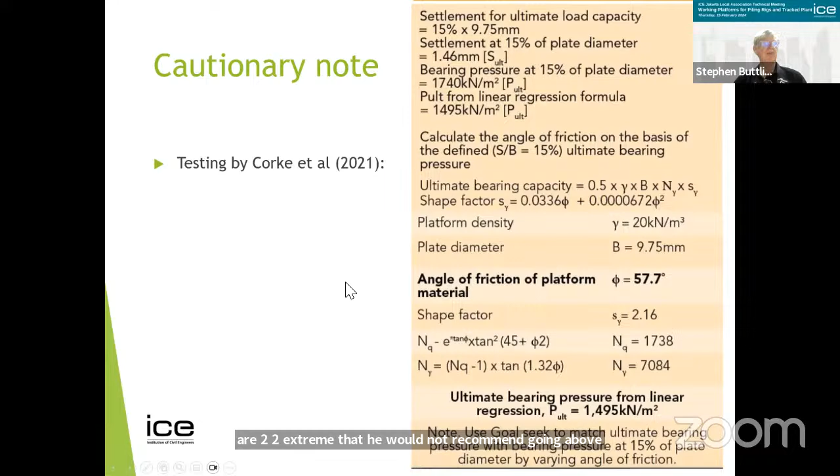Here's the test result, a whole range of test results with different ratios between the plate diameter and the maximum particle size. And you can see that they're all up in the 50s. There's nothing even anywhere near that. In fact, they're all above 57 degrees and they're in quite a narrow band.

The TWF manual points out that BR470 is very sensitive to the input parameters. In practice, the analytical method has proved extremely sensitive to the values used for the platform material and the subgrade, the same thing that David Corke had said.

BR470 is limited to cohesive subgrades between 20 and 80 kPa, although that's a very useful range, and you need to take great care if you're going below 20 kPa. It only allows two layers, the platform and the substrata, so if there's more than one layer, you have to take the worst case. It is conservative in that regard.

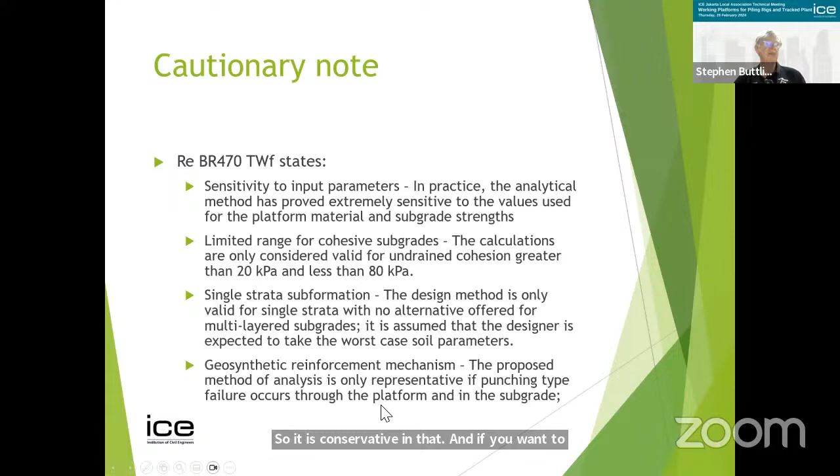And if you want to use geosynthetic reinforcement, the method of analysis is very simple, and there are probably better ways of doing that analysis.

In conclusion, looking at the comparison of the 5 different methods that I did, none is consistently conservative or non-conservative. The conservatism varies from one case to another. The benchmarking data which the FPS used creates, I believe, a very good standard, a baseline against which other methods can be calibrated for non-stabilized platforms on cohesive subgrades.

Methods which suggest thinner platforms are potentially unsafe and need to be calibrated against the dataset. It appears that the use of strength factoring of the platform in the T-value method may be adversely affecting some of the conservative values there, and Andrew Lees was going to look at that further.

A similar exercise for granular subgrades I've got in hand at the moment, and we'll be publishing the results when they're available. I've still got to do the calculations with the TWF method and with the T-value method, because Andrew Lees published a later paper covering granular subgrades.

Please remember that the loading factors in BR470 are empirical in nature. There is nothing fundamental about those loading factors. They are not factors of safety, they are not partial factors, and they cannot be taken out and used within other methods to produce working platforms of lesser thickness, which I have seen done.

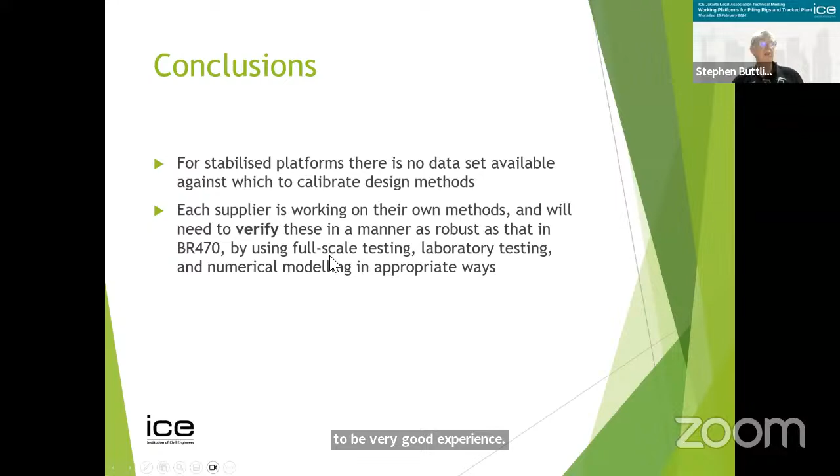That's a big no-no. For stabilized platforms, unfortunately, there's no data set available against which to calibrate any design methods. So suppliers are working on their own methods, and they'll need to verify these in a manner as robust as that used in BR470, with which we've had 20 years of experience now, and it seems to be very good experience. But the calibration would need to be done with full-scale testing, laboratory testing, and numerical modeling in an appropriate way. So that brings me to the end of that.

But shall I try and run these videos? Because they're instructive. Yeah, hang on, I can't, I've lost my microphone. I can hear you. Oh good. Yeah, try. Okay, right, I'm going to stop share, and then I'm going to share. Are you seeing the right thing? Not yet. Are you seeing it? No, not yet, sorry, okay, wait a minute. Yep, okay.

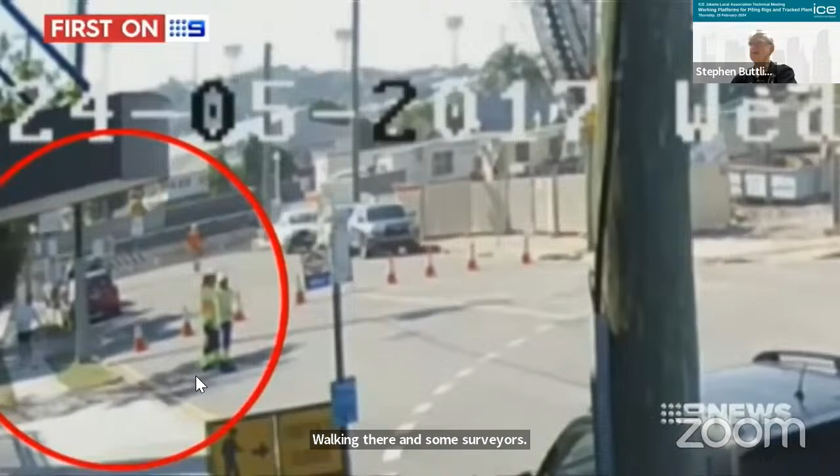So this was in Brisbane in about 2017. You can see there were two people walking there and some surveyors. And lo, here it comes, crashing down. Really very, very lucky that nobody was hurt, but that was more by good luck than good judgment.

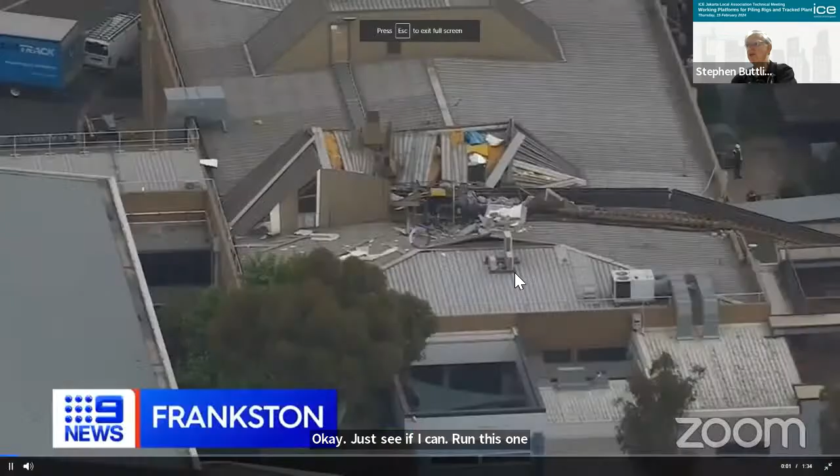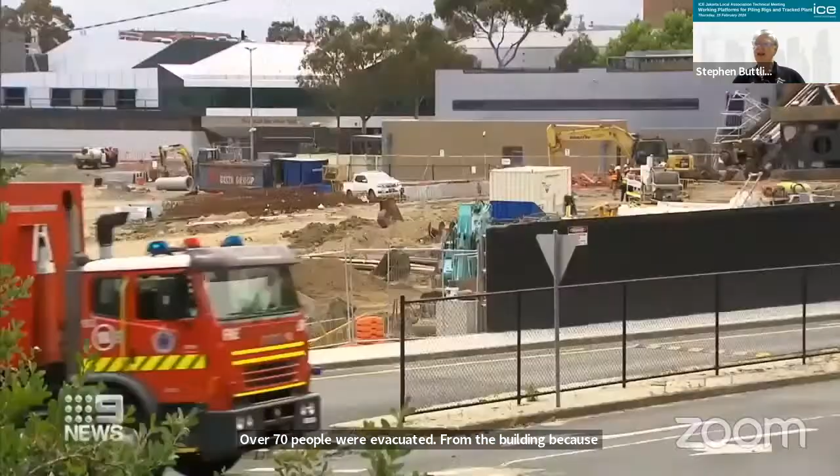I'll just see if I can run this one. So this was in November of 22 in Frankston in Melbourne. The amazing thing here was that this crane crashed down on the roof of a psychiatric unit. Over 70 people were evacuated from the building because although it had a tin roof, underneath the tin roof there was quite a significant concrete structure. There's the people being evacuated. So they were real people. You can imagine what might have happened if that had been a lighter structure.

Okay, so now I'm going to try something. Just going to try one more.

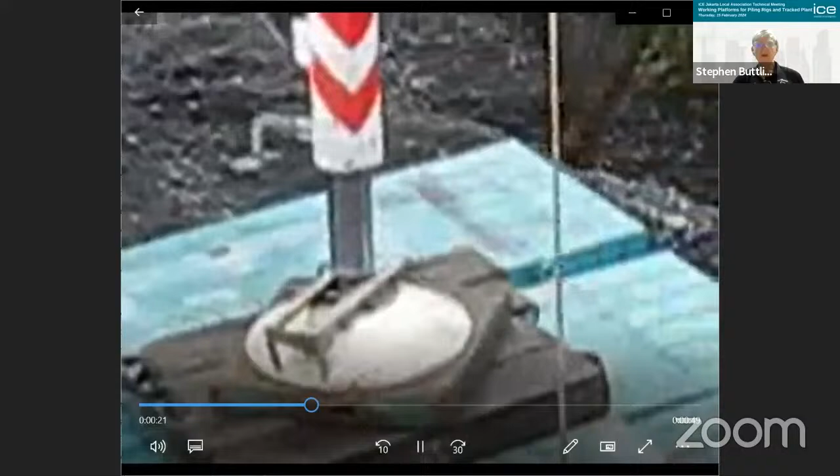We can see it. Okay, so this is down in New Zealand, and they seem to be lifting off a steel beam from a bridge for reasons that I don't know.

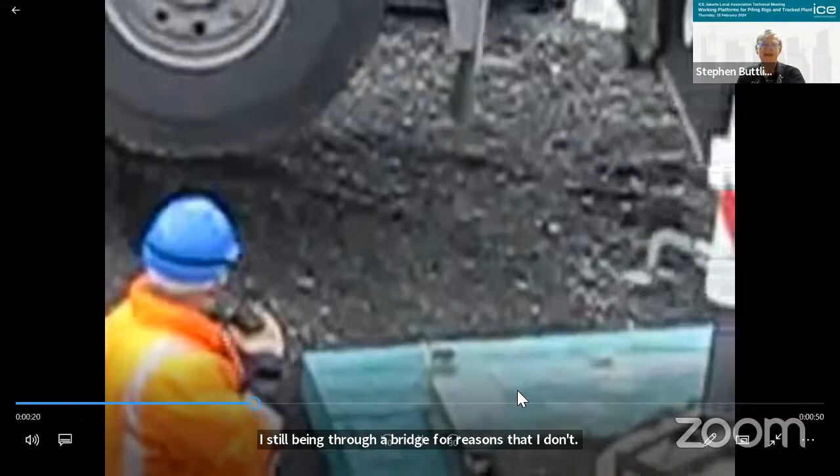But you can see a crack there, just behind the gentleman in the blue hat. This is one of these case one loadings—things are happening, but you can't put the load down fast enough.

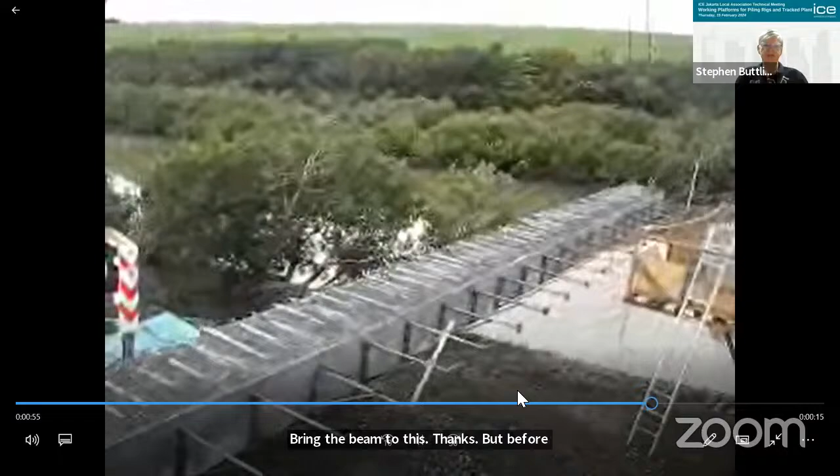So I can tell you more about those things if anybody wants to know, but I'll stop sharing now and let you fire away.

Stephen, that was very, very interesting. We certainly have some minutes for a question or two. Would anybody like to ask a question? Yeah, Phil.

Thank you, Stephen, your presentation was fantastic. Just a couple of comments really. The first was about the last video—slope stability analysis can be equally important as the actual platform. I worked in the Waikato and Brisbane, and certainly if you're using big cranes next to creeks or rivers, you have to also do the slope stability analysis as well as the platform analysis you've talked about.